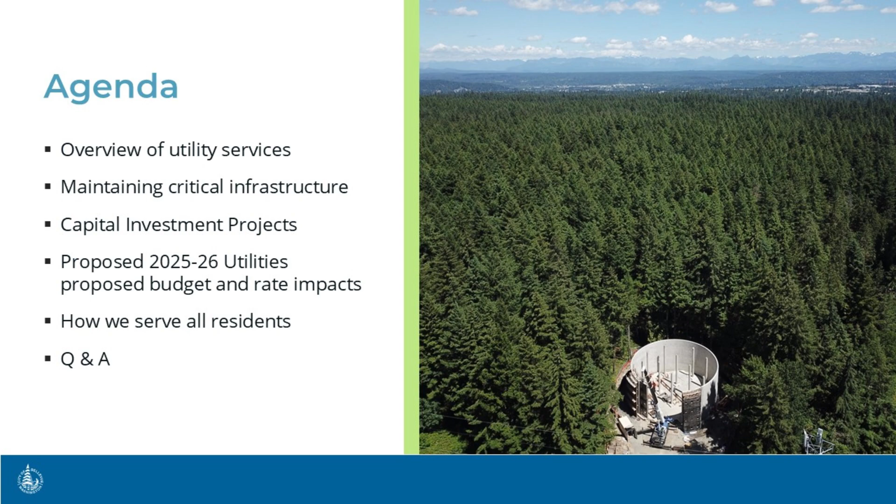Water. In addition to Bellevue, we also provide water service to the Points communities. Bellevue's service area ranges from sea level to about 1,500 feet above sea level. And we have more than 70 different pressure zones that we manage, and it takes over 600 miles of pressurized pipes, as well as reservoirs and pump stations, to deliver water to our customers' homes and businesses.

Most of our system was built 30 to 50 years ago, and it's past its midlife. We serve over 260,000 people during the day and over 155,000 at night. The higher daytime population served is due to the commercial and business activity that we have in the city. Our water comes from pristine watersheds in the Cascade Mountains and is some of the best quality and best tasting water in the nation.

Our sewer system is made up of pipes and pump stations. We operate 46 pump stations and over 600 miles of sewer pipes that collect and send wastewater to King County's regional system. Our goal is to ensure public health and safety for our community, as well as to protect the environment. As with the water utility, in addition to Bellevue, we serve the Points communities and Beaux Arts. The sewer system relies on gravity for flow. So in addition to the hundreds of miles of pipe we have, our pump stations help carry the sewage to higher levels where gravity doesn't get the job done.

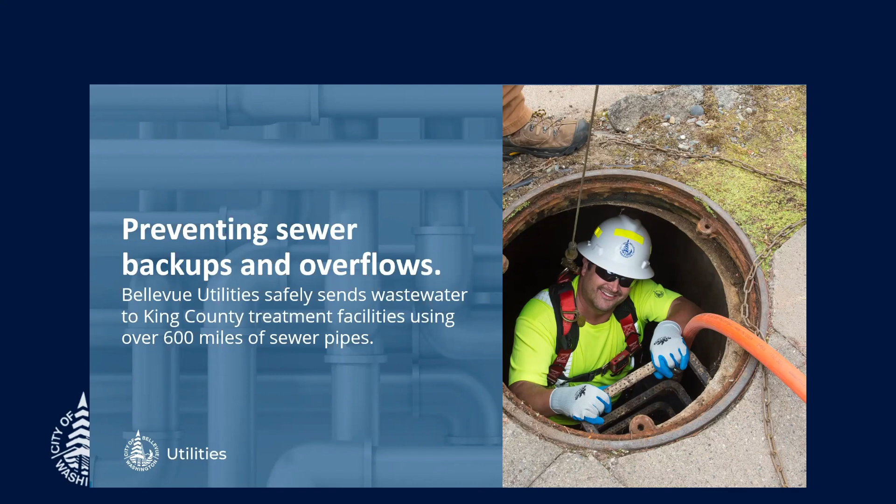And moving to our storm and surface water utility, our service area is only within Bellevue city limits. We protect water quality for over 80 miles of open streams and 800 acres of protected wetlands to support fish and wildlife habitat. We also maintain more than 400 miles of pipes, storm drains, and culverts to control damage from storm events and to protect the environment. This system covers 32 square miles.

The storm system is unique in that it's made up of both public and private systems that are interconnected. The city is responsible for all drainage within city streets and public property, and private property owners are generally responsible for the drainage systems on their own property. What this creates is a patchwork of ownership and responsibilities that makes management of this system more complex. Next, I'd like to take a moment to share with you a quick 3-minute video that highlights some of the activities and some of the capital projects that we have been working on to maintain and sustain our utility infrastructure.

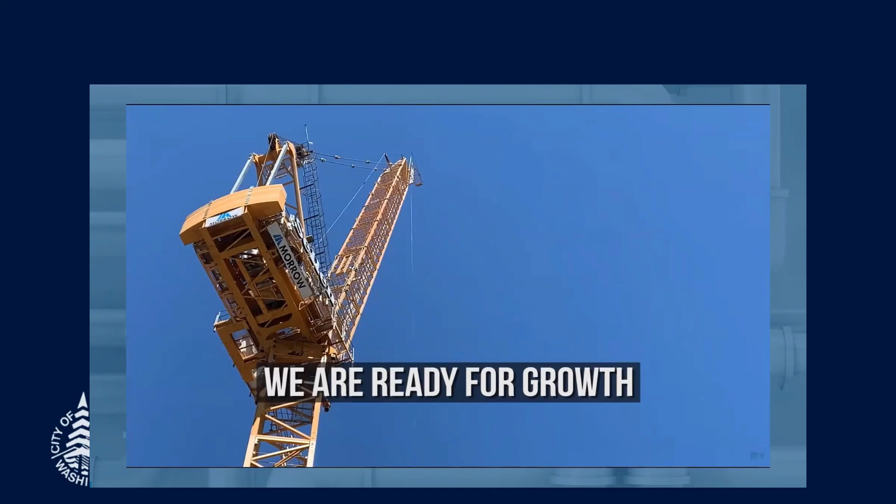Next, I'd like to share a little more background about our services and the challenges that we face. Our services are largely invisible to the public and are often out of sight and therefore out of mind unless there's a disruption of service. So success for us is often measured by the absence of failures. You may not be aware of this, but utilities operates as a business within the city structure. And by law, each utility must be managed as a standalone business and has to be financially self-supporting. Utilities does not get any tax revenues. The rates paid by our customers are our primary source of funding. And our revenues do not generally grow very much without rate increases.

With ongoing conservation and more water efficient appliances, population growth really does not translate to meaningful revenue growth for us. And as you've already gathered, utilities is a very capital intensive industry with lots of infrastructure to maintain. Our services are not scalable. We have to stand by to deliver services to all areas and all customers on demand. So our systems have to be sized to meet peak demand levels, even though we may only have peak levels for just a few days in the summer. For example, this is when we have extraordinarily hot days when drinking water demand may peak, or when there's a heavy, intense rain event that may pose flooding risks to our storm system. We have a very long range planning horizon because we provide essential services that the community relies on.

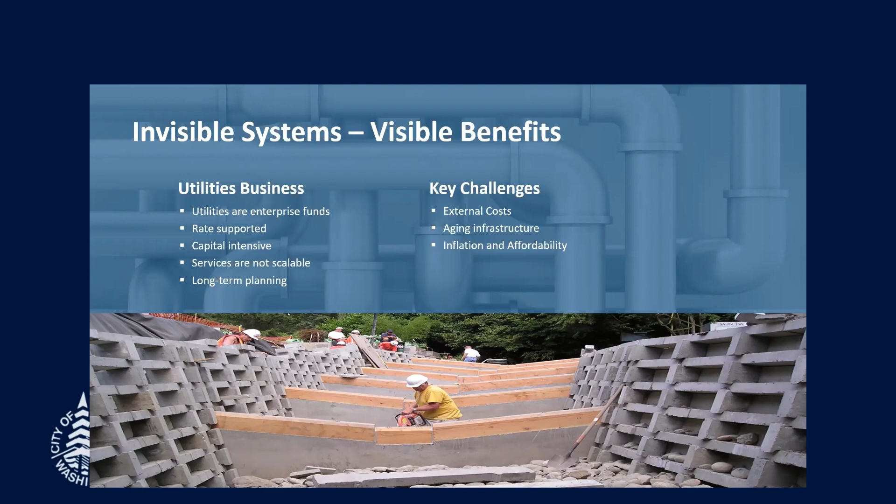And in terms of challenges, utilities has a number of key challenges. One, about half of our budget is to pay for non-discretionary external costs. This includes water supply from Cascade, as well as wastewater treatment from King County. We own and operate over $10 billion worth of infrastructure that is aging, and so maintaining and rehabilitating this infrastructure is a key challenge. Also, utilities is a highly regulated industry, and the cost to comply with regulations is a key budget challenge for us. And Bellevue has experienced unprecedented growth and development, so we need to make sure that our utility infrastructure is in place to support the city's economic prosperity and population growth. And like everyone, we are also impacted by extraordinary inflation as well as affordability considerations. Next, Don McWilliams, our operations and maintenance manager, will discuss how we take care of our utility infrastructure.

Thank you, Lucy. Without regular investments, our pipes and natural systems will fail. Water main breaks, sewer overflows, and stormwater flooding events often occur without warning. Consequences of system failures are disruptions to our customers, potential damages to homes and businesses, risk to the public health, and damage to the environment. Our operation and maintenance staff respond to these events by fixing water main breaks and service line leaks. Crews clear sewer blockages within the city-owned infrastructure and respond to flooding events as they occur. Maintenance staff are available 24/7 to perform this work so that we can mitigate the issue and get our customers back in service.

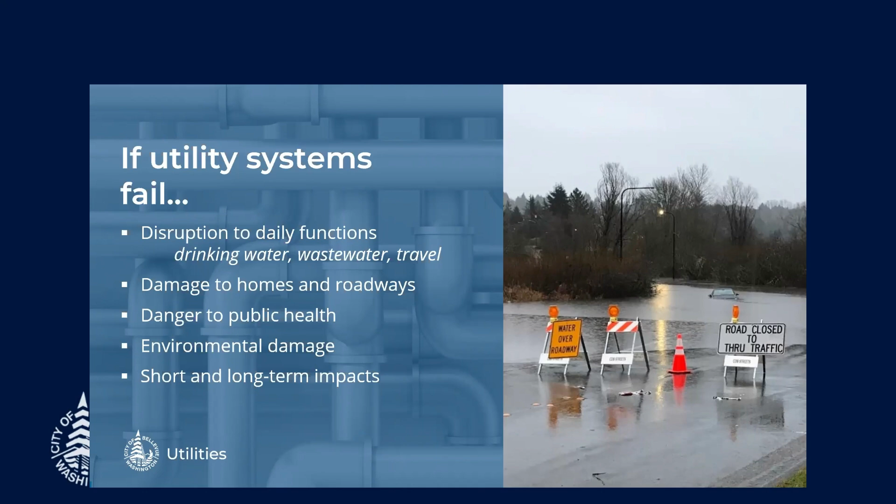While reactive emergency response gets the headlines, our goal is to minimize the number of these types of failures through a strong asset management program that emphasizes preventative maintenance and condition assessment activities. Preventative maintenance activities include exercising and inspecting fire hydrants and valves to ensure hydrants work when called on, cleaning sewer mains to minimize blockages, and inspecting and cleaning the stormwater system to ensure it is functioning as designed.

Corrective maintenance activities include repairing known defects within our sewer and stormwater system before they become bigger problems, while preventative maintenance activities work to ensure system reliability to keep the systems up and running. Our condition assessment program uses digital video cameras to view and assess the inside of our sewer and stormwater pipes to identify defects that could lead to structural failure and result in blockages.

Undetected pipe defects often lead to sewer blockages and overflow, which impact homes, businesses, and the environment. These types of defects can also result in flooding from storms, again impacting our roadways and customer properties. We work to coordinate repairs with other city activities, such as our transportation pavement overlay program. This saves money and lessens customer impacts through coordination across departments.

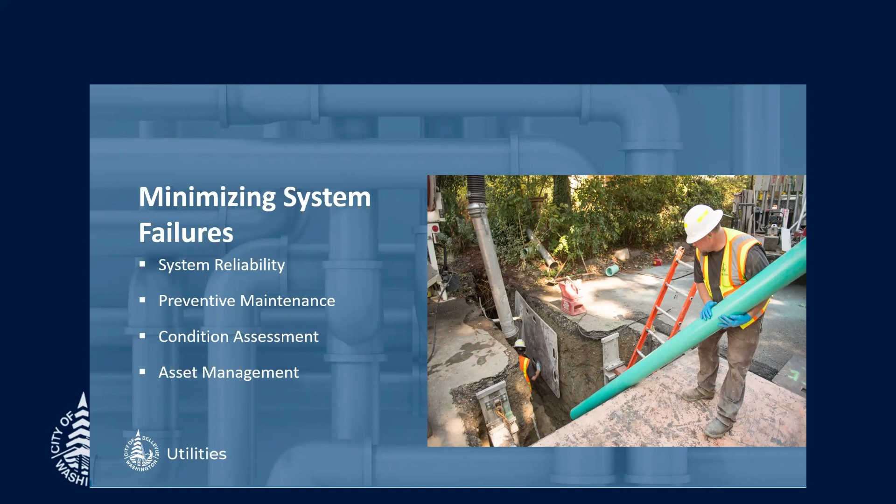And our asset management program uses the video information from the condition assessment to inform our capital investment program and works to optimize our maintenance intervals. As it relates to our utility system operations, Bellevue is a city built on hills that range in elevation from Lake Washington to the top of Cougar Mountain. With that topography comes operational challenges that drive how we operate the water and wastewater systems in the following areas.

Our water pump station, reservoir, and pressure regulating valve, or PRV programs, maintain and operate the city's water reservoirs, pump stations, and our pressure regulating valves. The south end of Bellevue, Somerset, and the Cougar Mountain area rise to 1,500 feet elevation on the top of Cougar Mountain. This adds complexity to operation of the water system for reliable delivery of water to our customers with acceptable water pressures throughout the city to all of our pressure zones.

Well-maintained pumps and PRVs are critical to making sure we have adequate and reliable water supply for firefighting and within our homes. And in addition, water reservoirs are cleaned every 5 years to ensure safe drinking water. On the wastewater pump stations, similar to water, wastewater operations provides regular maintenance to the city's wastewater pump stations to ensure continual operation and minimize wastewater overflow. Occasionally, our pumps will fail and need to be taken out of service. Because of this, all of our pump stations have multiple pumps for redundancy.

And I want to note that most of the wastewater pump stations are located next to the shorelines of Lake Washington and Lake Sammamish. This proximity heightens environmental concerns for any failures or overflows into our lakes. The telemetry and security systems involve the maintenance, operation, and repair of the utilities telemetry system. This important system allows us to control, monitor, and measure information such as reservoir levels, water pressure and flows, and sewage pump station levels from our supervisory control and data acquisition, or SCADA, system.

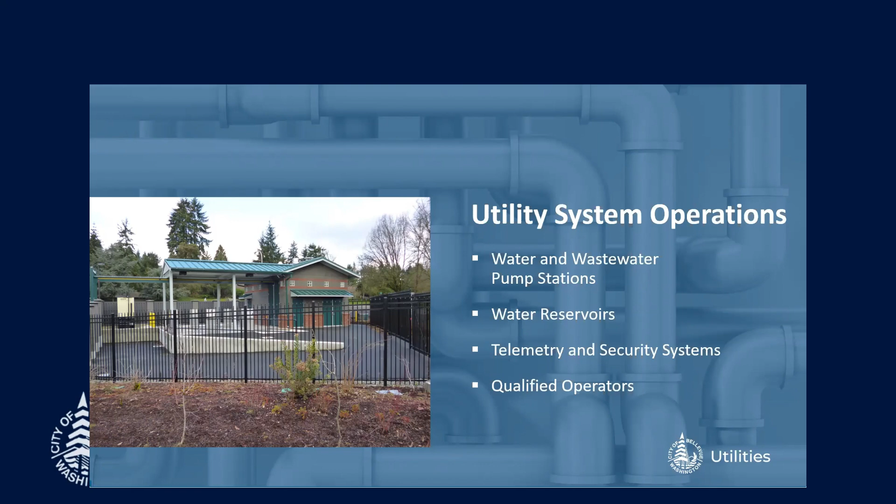All of these programs require well-trained and competent staff. Many of our staff are certified, and we have ongoing training to ensure that we operate all of our systems in a safe and effective way, which leads us to the next slide on regulatory requirements. So Bellevue's drinking water is regulated under the Federal Safe Drinking Water Act, along with the Washington State Department of Health. Major areas of that regulation include our annual drinking water quality report, which was published this past June. This report contains information on how we monitor, protect, and test to ensure the safety of our drinking water.

Coliform monitoring is a program done to protect the health of the public, and we conduct about 150 routine coliform bacteria samplings per month throughout the service area to ensure acceptable bacteriological quality. We do lead and copper monitoring to assure effective corrosion control, as well as PFAS monitoring performed under our unregulated contaminant monitoring rule. Bellevue's drinking water is safe and meets all federal and state drinking water standards.

Bellevue's surface water compliance lies within our National Pollutant Discharge Elimination System, or NPDES, permit. This is a requirement of the Federal Clean Water Act with oversight by the Washington State Department of Ecology. It requires municipalities to implement a citywide stormwater management program to protect the water quality of our lakes, streams, and wetlands by minimizing pollutant discharge from the city's stormwater system. Next, I'm going to turn it over to Linda DeBolt, who's going to speak with you about capital investment.

We continue to invest about 80% of the capital budget for renewal and replacement of aging water, sewer, and stormwater infrastructure. Our asset management program helps to prioritize infrastructure replacements at the optimal time, not too soon and not too late. The goal is to minimize costs and maintain service delivery to the community.

We have also included funding for capital projects to preserve and protect the natural environment of Bellevue's aquatic resources. In addition, our CIP includes utility projects to accommodate Bellevue's growth, to address emergency water supply needs in the event of an earthquake, and to realize operational efficiencies for our utility work.

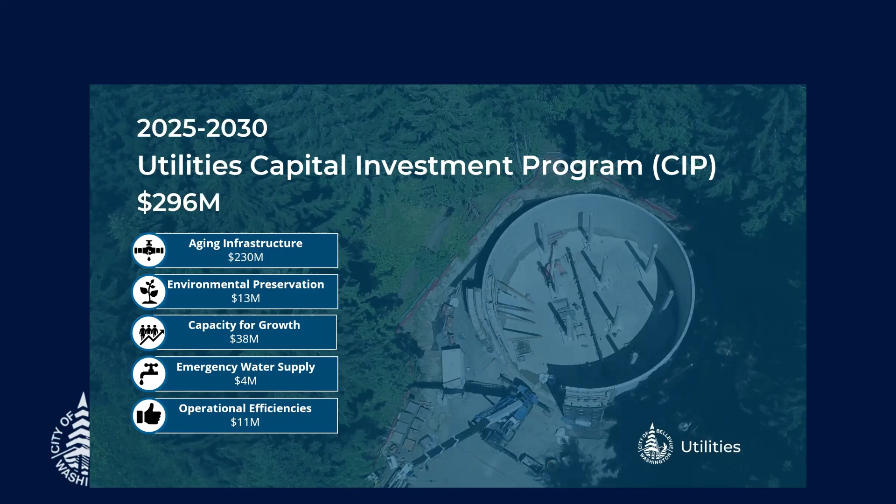Our proposed CIP consists of 3 utility funds, water, sewer, and stormwater, with 33 separate programs within these funds and many projects within these programs. The water utility has the most investment, with 64% of the proposed capital budget. The Water Main Replacement Program is the largest program within the water utility.

Through this program, we replace aging water pipes that have reached their useful life. The goal of our Water Main Replacement Program is to replace about 5 miles of pipe per year. At this rate, it will take over 100 years to replace our entire pipe system.

Next, the Sewer Utility CIP funds projects to replace or rehabilitate aging pump stations and sewer pipes to ensure that wastewater is collected and conveyed to King County's regional treatment plants. These projects improve system reliability, meet safety and regulatory requirements, and reduce the risk of system failure, thereby keeping sewer infrastructure running efficiently.

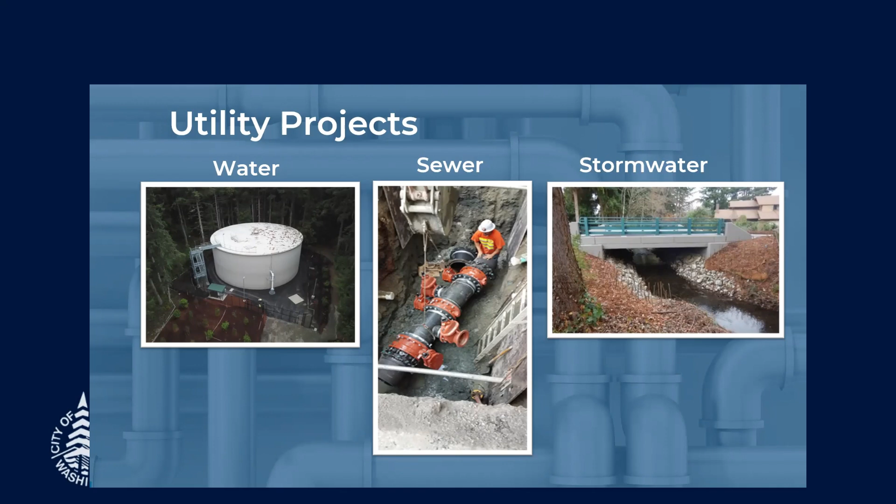The Storm and Surface Water Utility CIP includes projects that prevent stormwater flooding, improve stream health, and preserve and protect the natural environment. Next, I would like to turn this over to our next presenter.

Thank you, Linda. As we discussed, our only source of funding is the rates you pay. We go through a very rigorous process every 2 years to determine our budgets and rates. What I can tell you is that the rates are not decided in isolation. It's a careful process with many levels of scrutiny and input.

It begins with the utilities leadership team providing the first layer of review, and fiscal stewardship is very important to our team. We understand that we run a monopoly. If you live in Bellevue, you don't have a choice of getting utility services elsewhere. It's our job to make sure every financial decision we make is the best use of customer rates.

Utilities budget and rates are also reviewed in detail by the Environmental Services Commission. The commission is a 7-member citizen advisory committee appointed by the council. Over the last few months, the commission reviewed the budget in detail over 9 meetings. The commission's role is to provide a recommendation to the city council on whether the budget and rates should be approved. They hold a public hearing and gather comments before making a formal recommendation to council.

Utilities is unique in being the only department in the city whose budgets, both operating and capital, are reviewed by such a commission. The budget and rates are also reviewed by the city manager before she decides what to forward to city council for consideration. And finally, after this rigorous process, the budget is presented to council for their review before adoption by the council.

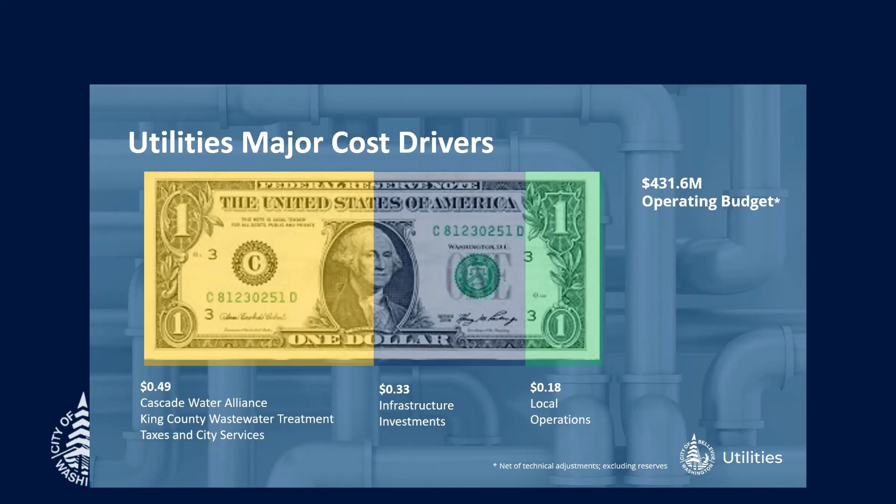The bottom line is this: we have worked hard to control rate increases where we can, absorbing inflationary costs to the extent possible, and external costs and investments in infrastructure are the primary rate drivers.

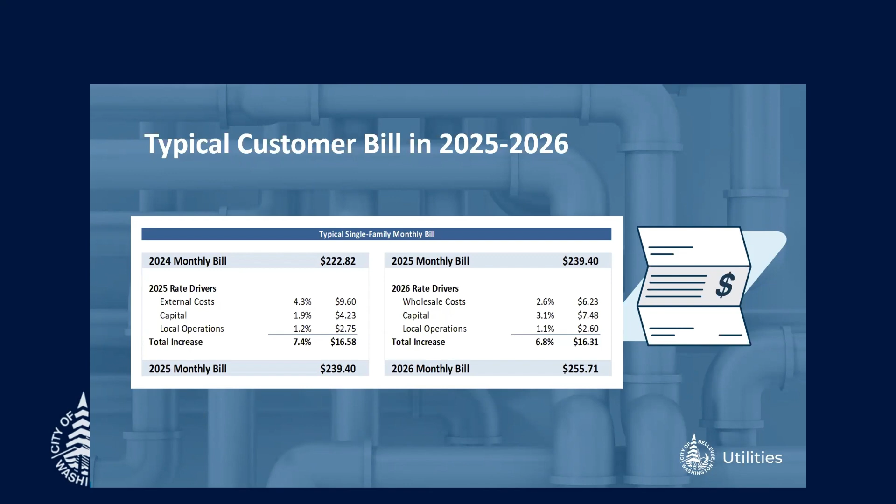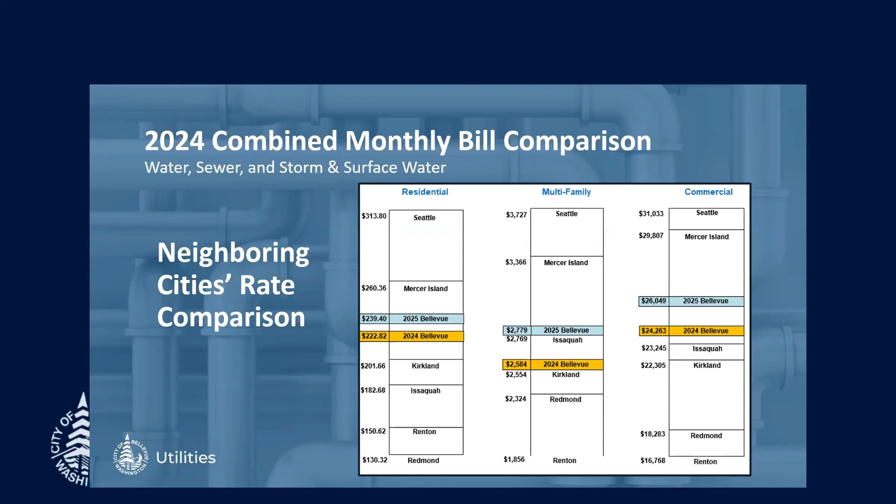Thank you, Scott. We offer ongoing utility rate relief programs to serve our low-income seniors and permanently disabled residents. We are very mindful of members in our community who may be in a disadvantaged financial position, and utility bills may be a hardship. We have several programs to help these customers. Those are ongoing utility rate relief programs to serve our low-income seniors and permanently disabled residents. This program provides a 70% discount to customers who receive a bill directly from Bellevue Utilities and a 70% rebate to customers of multifamily housing who receive utility bills indirectly from Bellevue Utilities.

We have the Emergency Assistance Program that provides bill relief for customers facing financial shock. This program waives up to 4 months of basic utility bills for qualified customers. A tax relief program is also available to provide a utility tax rebate to low-income households regardless of age or physical ability. Utilities administers this program paid by the general fund.

Our newest program that we implemented a few years ago is the Neighbors Helping Neighbors program, which waives up to 2 months of basic utility bills to households that are past due on their utility bills and are at risk of having their water shut off. This program is funded by donations from the community. To encourage donations, Utilities matches donations up to $50,000 per year. Almost 1,000 households take advantage of these programs. We spend over $1 million per year to help these customers. So if you know someone who may need these services, please help us get the word out.

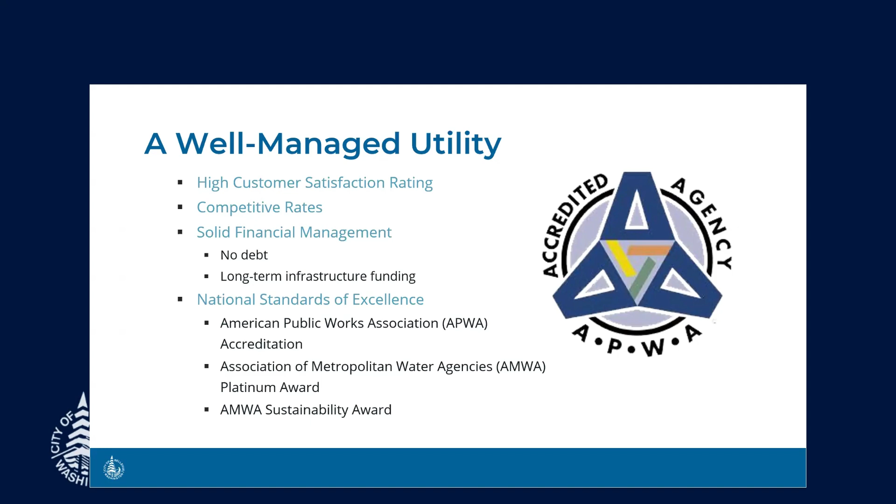To sum it up, we want to make sure we deliver good value for your dollar. As an example, how many of us have bought a bottle of water at the grocery store? For the price of 1 bottle of water you can buy from the grocery store, we deliver 80 gallons of mountain fresh water to your home. That translates to a little over 1 penny per gallon. It's a pretty good deal, right? This concludes our presentation. At this time, we are happy to answer any questions that you may have.